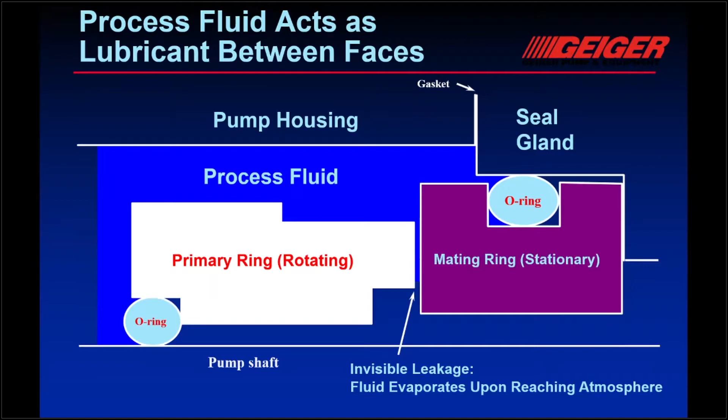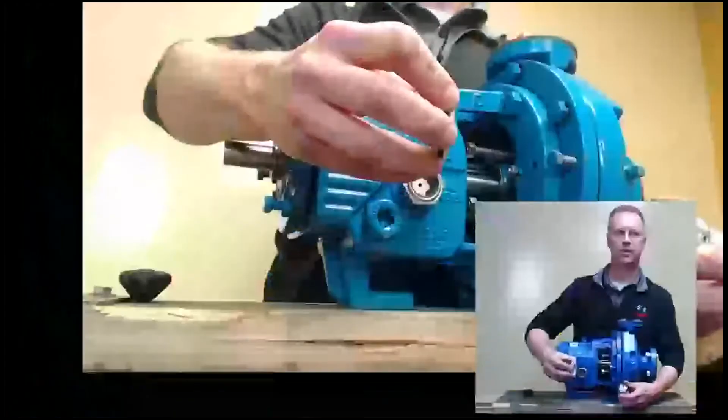So if we look at these, here's my primary ring or rotating face, here's my mating ring and seal face, if you can see them okay. And then we also have our seal gland, which is on the back side here. That all gets installed onto the pump and seals the fluid into the wet end of the pump and keeps it from leaking out.

So the whole idea is that these two seal faces are going to be super close to each other. It's going to allow a little bit of leakage, but that leakage should evaporate almost immediately upon reaching the atmosphere, and you really shouldn't have any drips coming out of your mechanical seal.

So in order to put one of these in, we have to do some checkouts of our pump. Now, this pump is our training pump, and I know it's in good shape, but I'm going to rattle through some of the things you want to check to make sure we have a good seal installation, whether it's a component seal or a cartridge seal.

Pump inspection. First thing we want to do is check for shaft run out. The PowerPoint will have a picture of the inside of this pump. I'm not going to pull it apart yet until we get into the seal installation, but let's talk about shaft run out.

The shaft could be bent, it could be moving up and down, it could be from old packing that was in there and you didn't replace the shaft. It could be off center. It could be lots of things, could be loose bearings back in the power frame, and so that shaft could move. Since our seal is attached to that shaft, that could cause us problems. So we want to check all that stuff.

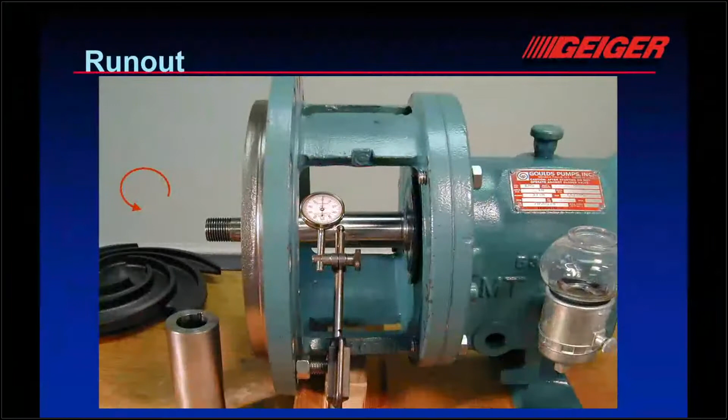Here's a picture of us checking the run out. When this pump is fully disassembled, if this was a real application out in the field, we would put our dial indicator close to the shaft and check for run out. Appropriate run out is a couple thousandths - we wouldn't want that thing moving more than that, otherwise it could affect your seal.

Another thing we want to do is a face run out. In here in the pump is the stuffing box, and there's the seal face. We want to make sure that's parallel and flat all the way around, because our seal gland is going to mount up against there, and we want that nice and straight. Important point: if you have excessive run out, this face should be true to two thousandths. If the face run out is larger than that, the seal faces could wobble and reduce your seal life. Keep that in mind, you might see that again.

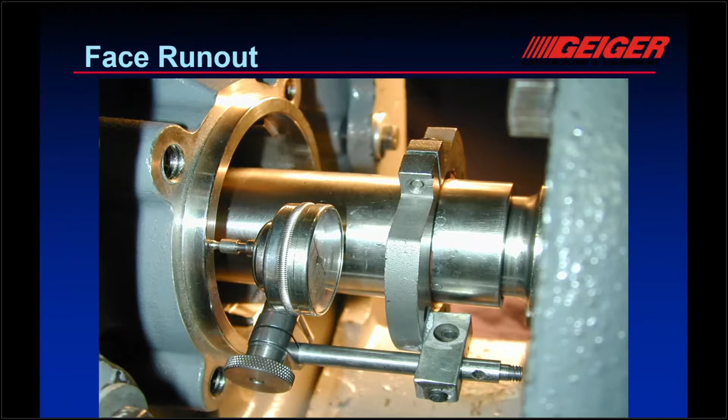So here we are checking the face run out, where we're actually rotating, mounting the dial indicator to the shaft sleeve, and rotating it right around the seal face, and that's this area right in here.

So we're going to start getting into installation of a non-cartridge component seal. We're going to do two seals today: a non-cartridge component type seal, which has components - a seal gland, the mating ring, our seal gland gasket, and our rotating or primary face. Over here we have our cartridge seal, which we'll do second, but it's just one piece. So we'll let you guess later which one's easier to do.

First thing we want to do is get our pump apart. This is a back pull-out design, and it'll be nice and easy to get this thing apart because I already undid some of the bolts. Before we pull this out completely, in order to do this seal installation, we need to make a scribe mark on the shaft sleeve here.

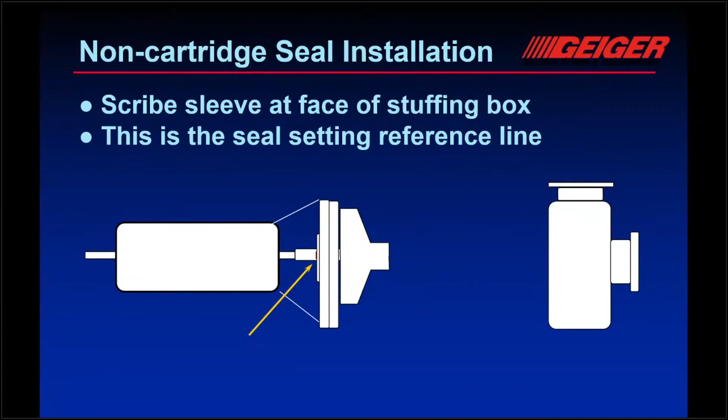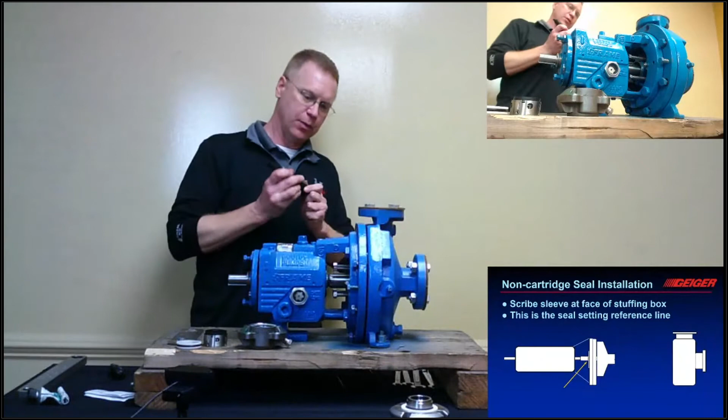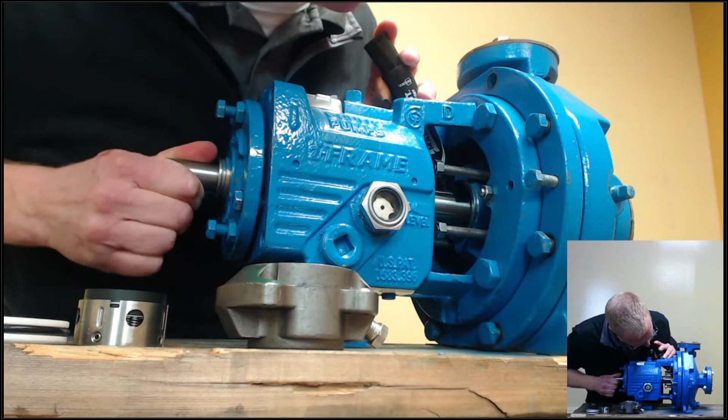There is a reference setting, which we will get into in a little bit, that is in the seal drawing - we'll get more detail on that - but everything on a component seal is off a reference mark, which is based upon where this seal face is. Since we have a stainless steel shaft sleeve, we're going to make a little mark here with Sharpie on our shaft sleeve, so we can scribe it and know exactly where the seal face is on the shaft sleeve.

So I'm going to mark this and make sure I get it good. And then I have a nice little flat straight edge here, and I'm going to put this right down here through and hold that right up against the shaft, nice and flat. When I rotate this, I'm going to scratch and make a scribe mark right on that black Sharpie marker. So I think I got that pretty good.

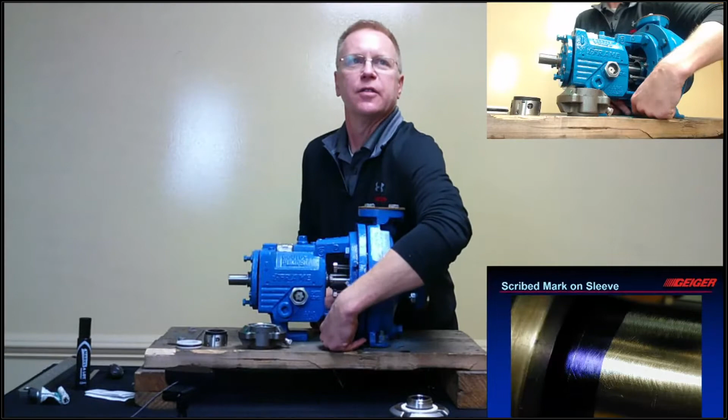Now we can start disassembling our pump, now that we have our scribe mark. Once we pull it apart, we're not going to be able to make that scribe mark very easily. There it is - in the PowerPoint, we made that scribe mark right in here. So we are good to go.

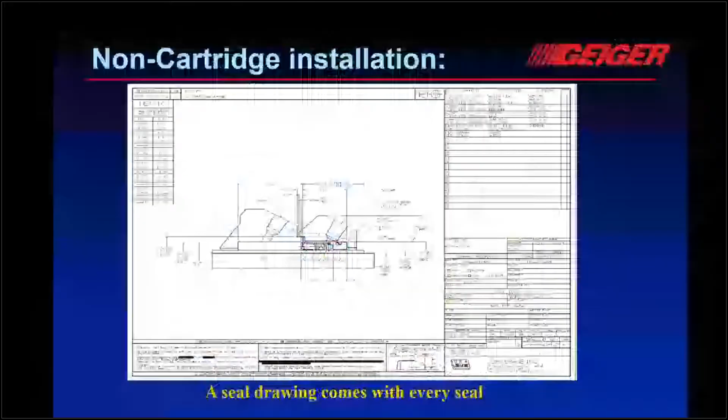On a non-cartridge installation, actually with any seal installation, you always get a seal drawing. So this is what a seal drawing looks like, and it has a reference mark or a reference set point. Important thing - see that in yellow down there? A seal drawing comes with every seal. It details everything out so that you know the clearances, so you know whether your seal is going to fit here into this pump.

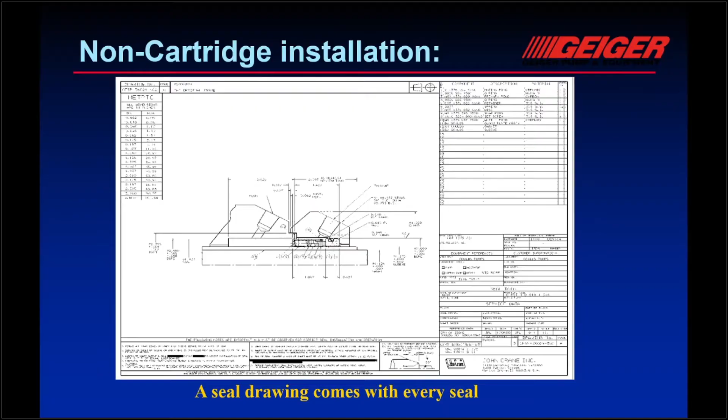For this particular pump or seal, we have a 1/16 of an inch installation reference mark. That is telling me where this primary ring will go onto the shaft sleeve. It's very important, and that's why we made that shaft mark. If you look at this, the seal face mark is right there at number 12, going down there. That's the front of that seal face. So we had to make that mark exactly on the shaft sleeve where that number 12 arrow is going to.

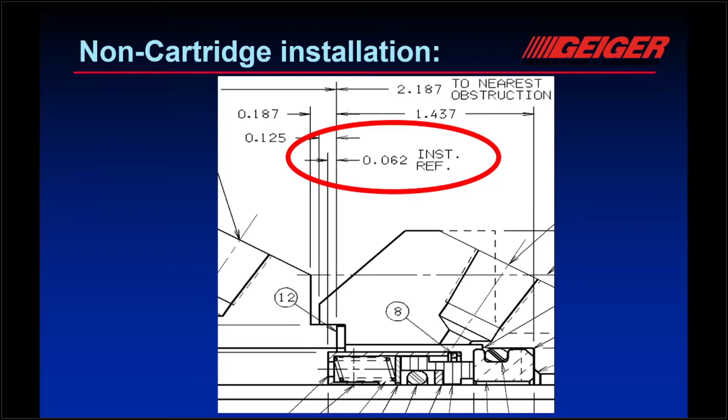And then we want to set our seal, the back of this seal, on the shaft sleeve when we pull everything apart, exactly 1/16 of an inch away from there. So I'm going to move some stuff out of the way here, and I believe I got all the bolts out. Yep. And we're going to pull this guy apart.

This particular pump is a Goulds 3196 ANSI pump, and just for information, the seals we're putting in today are both John Crane seals. They were nice enough to provide us this stuff for this training session. So we have the back pullout out. We have to get our impeller off.

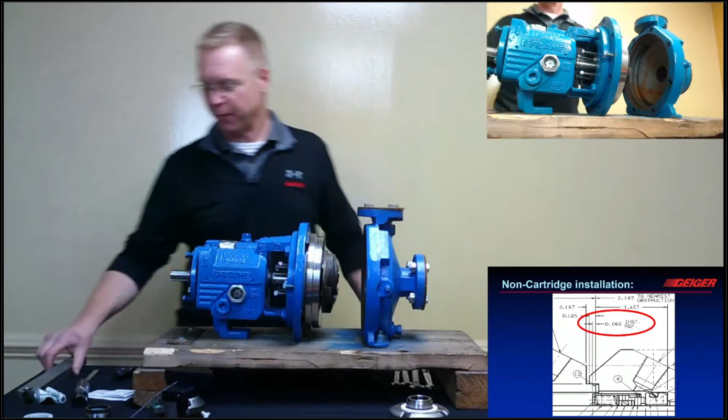One of the things - actually, the last course I taught, somebody asked, 'Boy, it's a pain sometimes to get the impellers off. Do you have any tips?' A lot of times you just have to use brute force to get the impellers off, especially if it's an old one. If it's one that's bolted and keyed onto the shaft, sometimes you might need to use wedges once you get the bolt out, behind the impeller, to slowly push it off. This particular pump has an open impeller with vanes, as you can see.

Somebody said, can't you put a screwdriver in here and wedge it to get this impeller off? I wouldn't necessarily do it because you can break a vane tip. But the easiest thing for us to do with this particular pump, since it's threaded on and rotational, is use this nice little tool we have. It's a big breaker bar, and we put this onto the shaft here.

When I slam this nice and hard, that impeller is going to come spinning right off. Look at that. So it wasn't super tight on there, but still this is a good way. Slam this thing a couple times, and for this particular pump, it works great for getting the impeller off.

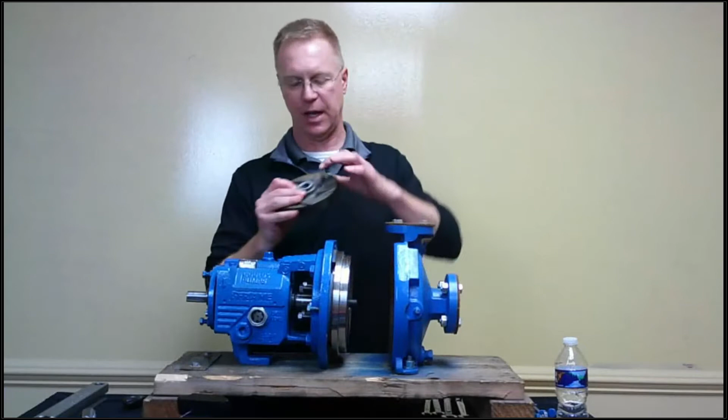Once we get this impeller off, I'll show you one quick thing. This impeller has an O-ring on it, which seals the shaft and keeps liquid from going up the shaft. It has a tiny little O-ring in here that should be replaced every time on this particular pump. You really need to look at your manufacturer for the pump to see if there's anything needed when you take your impeller off to get to your seal.

One other thing about this particular pump: it has a little space in here, and I've heard some people say, oh, we could heat it to help get it off. Don't do that on this particular pump. There's a little air pocket in here that can heat up, and this thing can pop and explode. So we don't want to do that on this particular pump. We just want to spin this thing off.

A strap wrench sometimes works for trying to get this off—just wrap the strap wrench around it. All right, so now we have our impeller off.

Now we need to take our stuffing box housing out of here. This is our stuffing box. There are 2 bolts that hold it on, and we're going to start removing this. Then we can get to our shaft sleeve. Very carefully, once the 2 bolts are off, we can lift this out of the way.

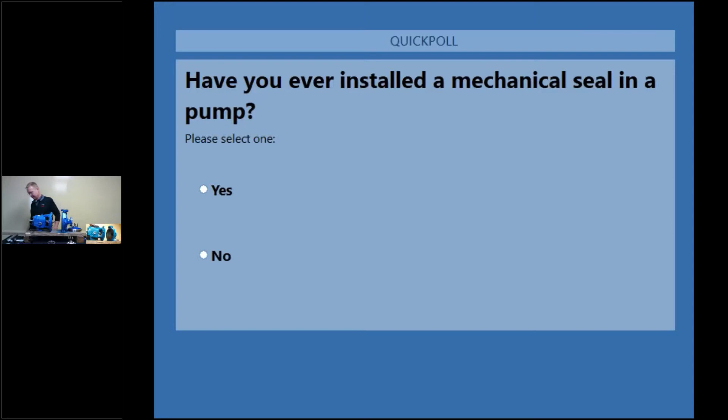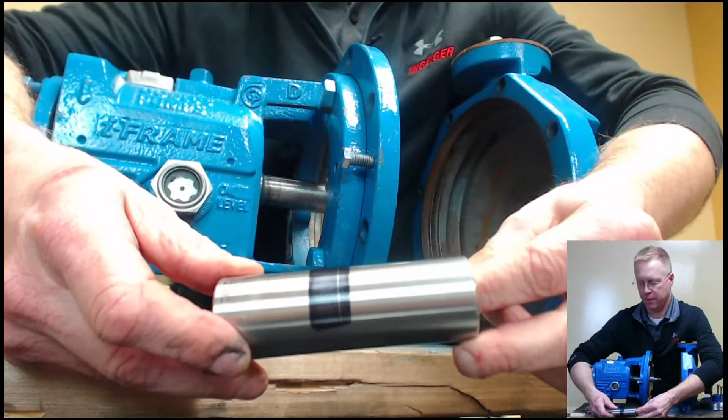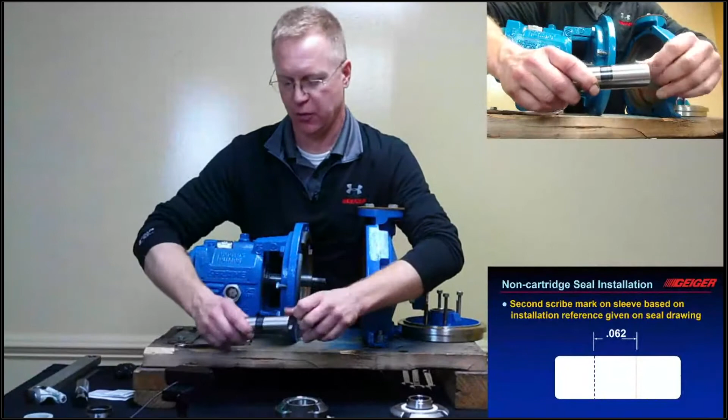We'll slide our shaft sleeve right off. So I can come down here and show you my nice scribe mark that I made. Right there, towards the impeller side. I have my scribe mark, and in this case we want to go 1/16 of an inch towards the impeller. If you remember, our shaft sleeve was installed like this, the impeller's over here, so I'm going to go 1/16 of an inch that way to set our seal.

That will be the back side of the seal. So what I'll do here is come up to a nice flat spot. I have my tool, and unfortunately I've got to take my glasses off to see this. We're going to measure 1/16 of an inch, and I'm going to make another scribe mark.

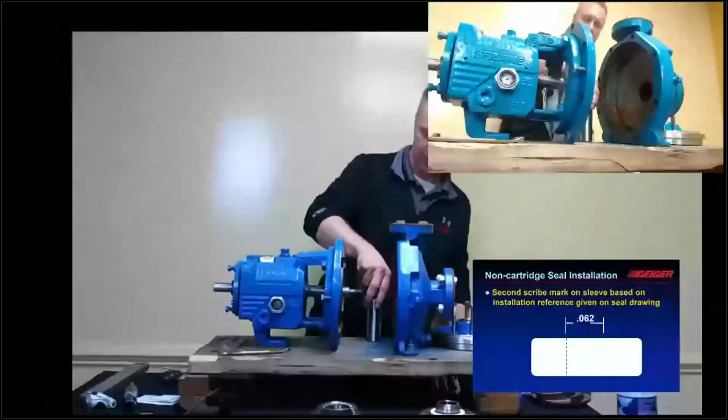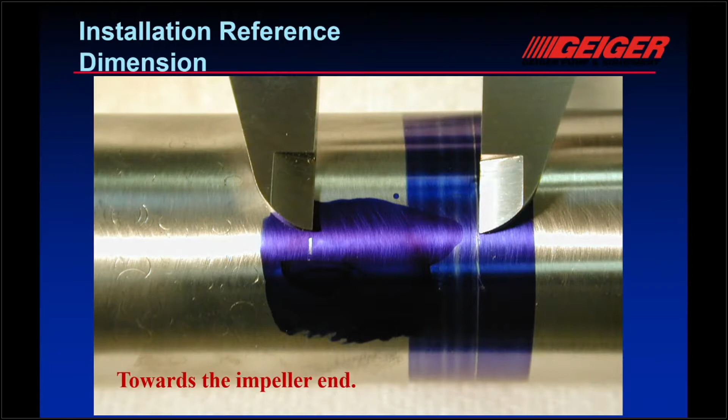It may be hard for you to see, but I can see it—I made a second scribe mark here, and that's where the back of the seal is going to get set. We're going to set that aside for a second. Let me jump ahead. So there's my second scribe mark, towards the impeller end. Now we want to start installing the cartridge, or the component seal, sorry.

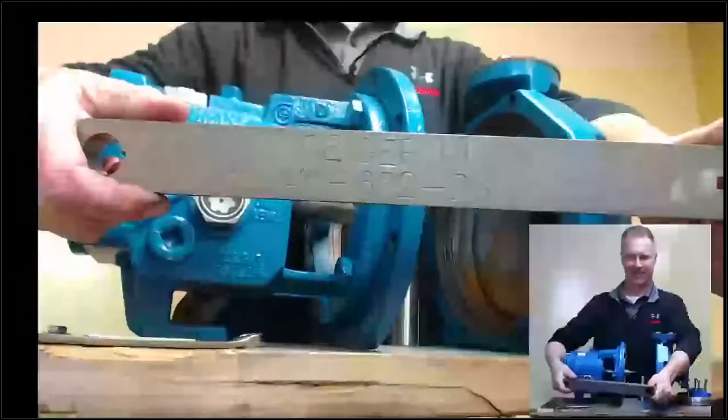Yes, and we'll zoom in on it. If you can see this, this is a homemade wrench. We actually make these in bulk because we're one of the largest distributors of Goulds pumps in the Northeast, so we made these wrenches since we're working these pumps all the time. This wrench is made by one of our machinists down in our Baltimore shop. We can make them for different shaft sizes depending on what your pump is, and we sell these for a couple hundred dollars. This thing is pretty heavy, cool steel here—very nice tool to have if you have a spin-on impeller.

Thank you for the question. So first thing we want to do, moving on.

We want to install the seal onto the shaft sleeve. We're going to go in one direction here, and we have a reference mark. First thing before even trying to put this on is let's make sure there are set screws on here, and make sure that these are all loose so that we can get this unit on.

One of the things I'll mention several times here, an important thing, is that we should keep these seal faces clean. Especially if you're working in a dirty environment, we'll want to clean these faces before install onto the pump.

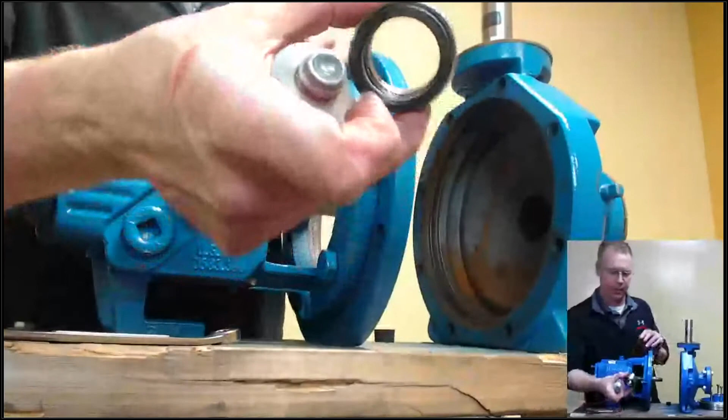Important thing to do when we're putting this on: we want to lubricate the O-ring. This has an O-ring that's sealing up against the shaft, right down in here. We want to get some lubricant. Very important, the lubricant should be compatible with the fluid that you're pumping. I think almost everybody here works in the water wastewater market, so you certainly don't want something incompatible to contaminate the water. Something that's food grade or the like would probably be good, some kind of lubricant just to help that O-ring slide onto the shaft here.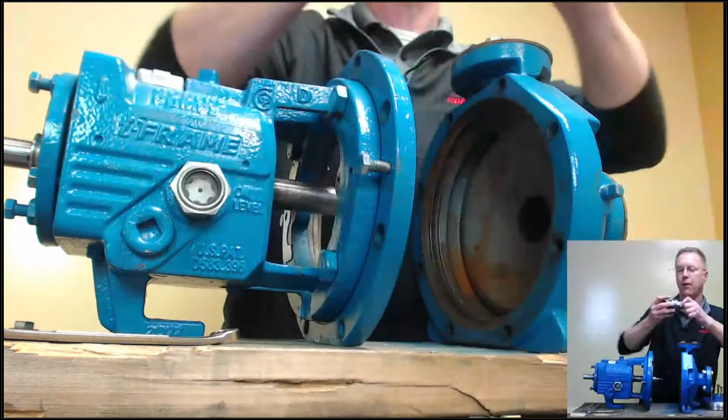We're going to slide this without touching the seal face, and we slid it on. Now we want to set the back end of this right to that scribe mark. I have that right on my scribe mark, and I want to go ahead and start tightening this unit down.

We want to tighten this evenly. We don't want to distort anything, the shaft sleeve, or have this thing off center. So lightly tighten it this side, go the opposite. There are 4 set screws to set this in place. We want to make sure that this goes on here nice and evenly. We don't want this thing wobbling.

Once we get this tight here, we don't want to over torque these when we're tightening them down, but we want to make sure they're nice and snug. Now that I've got them all nice, looks nice and centered, I can tighten that side. Real good.

All right, so we're nice and tight. Put that aside for a second, and we need to pull up our reference mark.

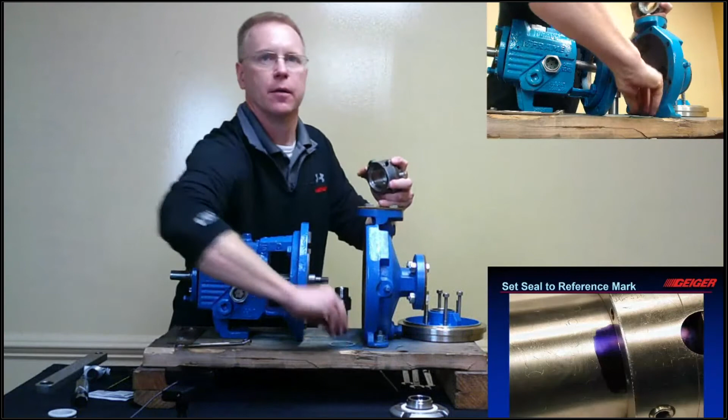We need to start putting our mating ring into our seal gland. Here's our seal gland, and here's our mating ring. Same thing, this has an O-ring, so we want to get our lubricant here.

Put that on the outside of the seal so we can slide this in. Now this one in particular has little notches in the back of it. Some seal glands will have pins in here, and they're anti-rotation pins. This one does not, but if you have a gland that has anti-rotation pins, you'll want to make sure that when you put this mating ring into your seal gland, those little notches match up to your anti-rotation pins.

Slide that in, and this is the part where you're definitely going to get your fingers on here as you're trying to push this in. Unfortunately, if you can use rubber gloves, that's good, but you still will want to clean everything prior to installation. Just make sure that this thing's all the way down and snug.

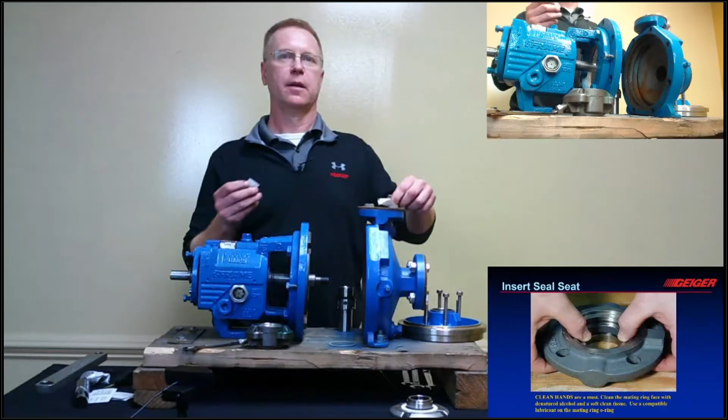We can clean it with denatured alcohol. I have some little alcohol pads. I'm going to go ahead and clean this, get this all cleaned up. Just wipe it real good, and we'll do the same here on this unit.

Can't forget to grab my gasket. Put our gasket on here.

Slide that up there. Now we'll go back and slide our shaft carefully up and slide. All right, so we're all set here.

One note to make, this seal gland happens to have a flush on it. So if you have flushed water going to your seal, some have them, some don't. It's not always necessary. If you're wondering whether you need flushed water to your seal, you really need to ask your seal supplier or manufacturer: this is what I'm pumping, this is the style of pump, do I need a flush, or should I have one? Obviously, flush gives you the longest life, but in some applications it's not always necessary.

Now that we have that all set up here, we can take our gland nuts off and slide our stuffing box back into the pump. I'm going to give myself a little bit more room here.

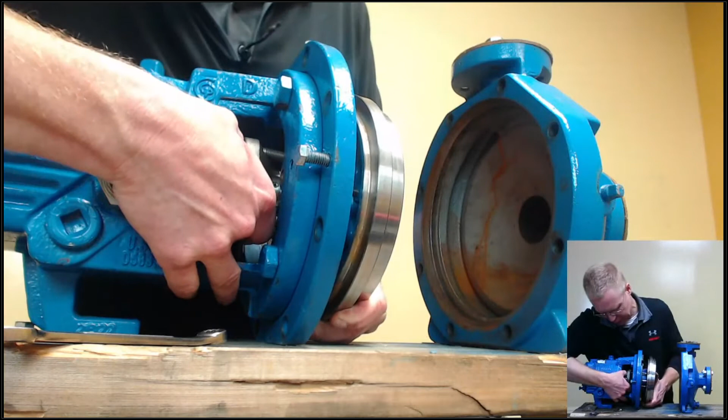So very carefully, we're going to hold everything, and this is a little bit of a challenge. If you have somebody helping you, it's always good. But very carefully, make sure the gasket stays in, and there we go. All right, all slid in.

All right, so the gasket's on, so now we want to go ahead and put our gland bolts back on to hold everything in place. One gland bolt. All right, and then we're going to want to tighten that up to make sure this stuffing box is nice and snug so that when we go to put everything back together.

So let's jump ahead there.

All right, so now we're at the point where the seal's on back here, but we don't want to put the bolts on yet because we want to make sure the shaft sleeve is in place. Remember, we talked earlier that this impeller holds the sleeve in place. You may have a shaft sleeve held in place with set screws, so you want to make sure that's in the right location, but with this one, the gasket and the impeller pushed up against it put the shaft sleeve into the right location. So before we put the bolts on the seal gland, we want to go ahead and get our impeller on and get that nice and tight. So we're going to spin this on.

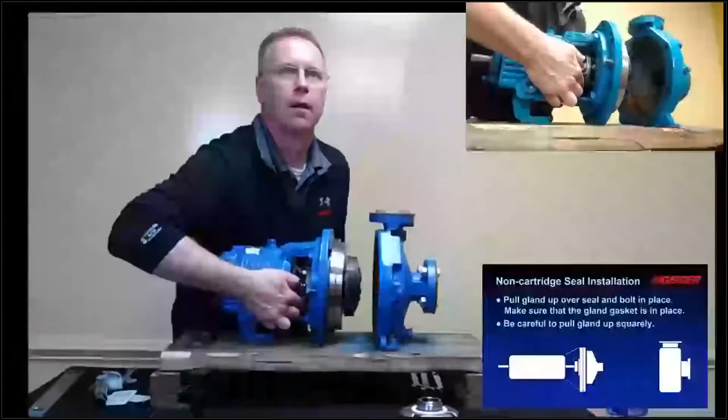So I'm going to do them by hand first, make sure they're all snug, and then we'll go and tighten them down. Almost there. Keep tightening it until we're nice and snug. Right, that one.

I'll mention one of the things: once we fully assemble a pump, at least in our shop, part of our standard practice is, after we've assembled a pump and put a seal in it, we pressure test the seal once it's all done. We'll reassemble the pump, put it back into the casing, seal off this end and the top, put a pressure gauge on it, and put air on it. We'll let it sit. Usually the guys try to set it up so it's sealed, put air on it, and let it sit overnight. When they're wrapping up for the day, they'll put the air on it and it will sit overnight. It's a good way to determine if our seal is leaking or not, if we installed it properly.

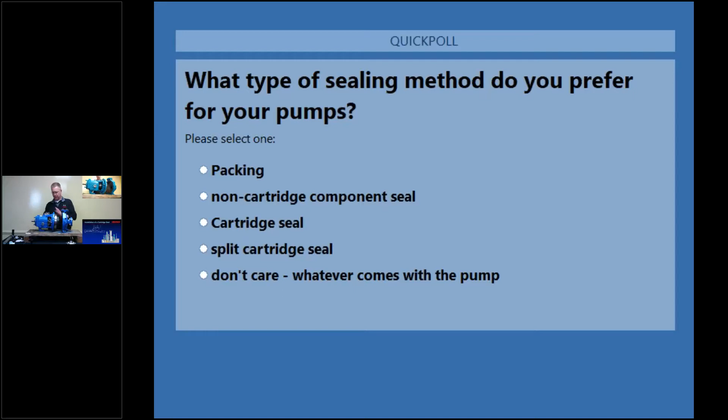How we look? 100%. All right. So you can put the video back on while I get these gland bolts out.

So we are done the hard one. Thank God. Takes a while, but like I said, the component seal can be a challenge, and if you mess up making the scribe mark or do something wrong, you can really be in trouble having to pull the pump back apart and reset everything and make sure everything's done.

So very shortly in a second, we're going to get to, so I can get these last couple of bolts out, get this thing apart, and we'll do the cartridge seal. One more bolt here.

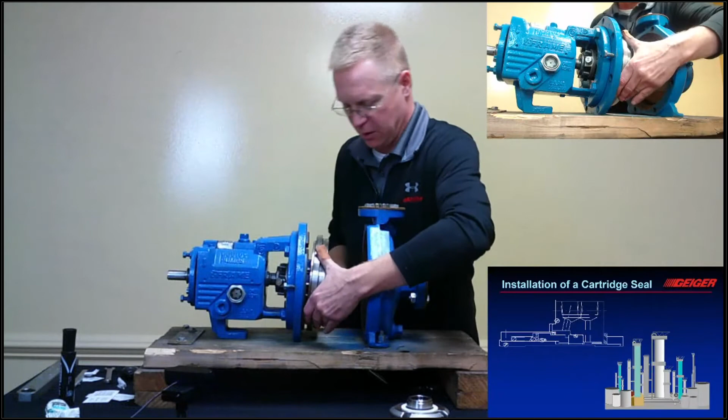So we're about 45 minutes in, and on the shortened version, it probably took us about 25, 30 minutes to put that component seal in. And I didn't even do any of the run out checks or any of that kind of stuff. We just kind of assumed that this thing was good to go.

Get the stuffing box off. There we go. Okay, so get our gasket out and shaft sleeve out, and get our component out there. So the last thing I have to do is take the 81T out of here. So we'll loosen up these nuts, set screws, and we should be good to go and ready to start installing our cartridge seal.

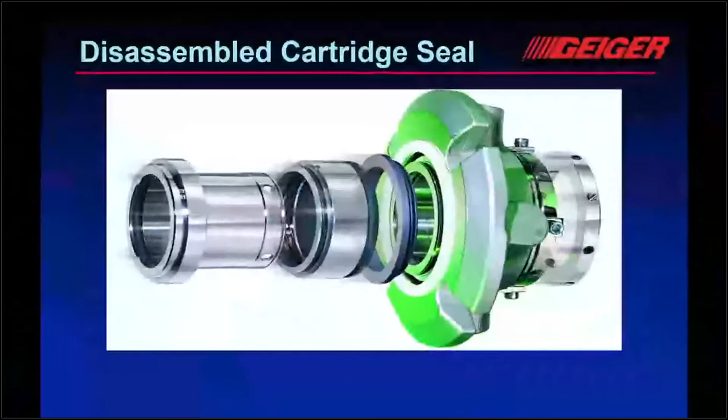Shaft sleeve out, and I'm going to put it up here. So let's talk about the cartridge seal. So cartridge seal, a little different, all one unit. What's holding this whole thing together are these set screws. When we start putting this together, you have these set screws here that are pretty much holding the whole thing in place. There are clips - I should say clips - these clips hold everything together. And then once we put our set screws onto the shaft sleeve and get this thing set in place, then we can get everything assembled and take our clips here out.

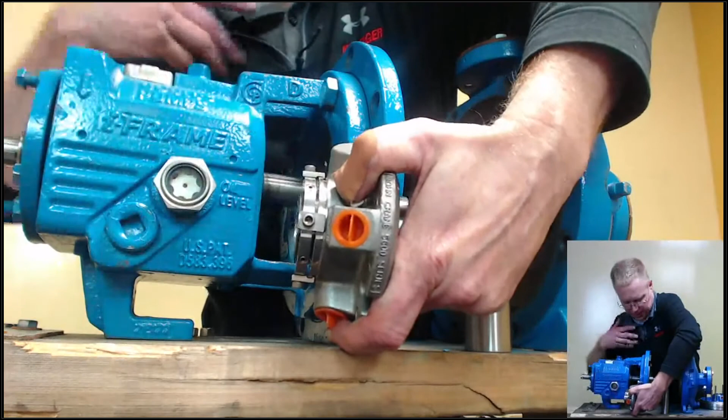But we have an exploded view in the PowerPoint right now up of the cartridge seal.

Question: is there not a specific torque for the bolts you're working on now? Can you be a little more specific on the bolts - is it the bolts for the stuffing box or the set screws? It was the ones, I think, for the stuffing box. For the stuffing box, there will be specific torque settings in the O&M manual for your pump. For this one in particular, I don't remember what they are, just because we're assembling and disassembling this pump. I wasn't really concerned with that, but your O&M manual for your pump should have specific torque settings to set the stuffing box in place, and even putting the casing back into the pump volute.

And then as far as the set screws torque setting, we want to put them in pretty tight, close enough. We don't want to egg-shape the shaft sleeve, but we do want to make it pretty snug so that those set screws don't come loose once we're putting that on. So hand tightening - maybe more than hand tight, but pretty snug. These set screws do have little dimples or points on them, so they dig into the shaft sleeve. If we put them in pretty tight, they should stay in there pretty good. There may be specific recommendations depending on your seal manufacturer, they may recommend a specific torque setting.

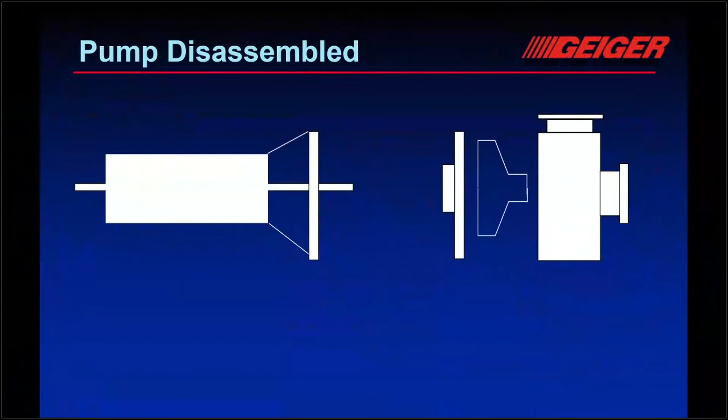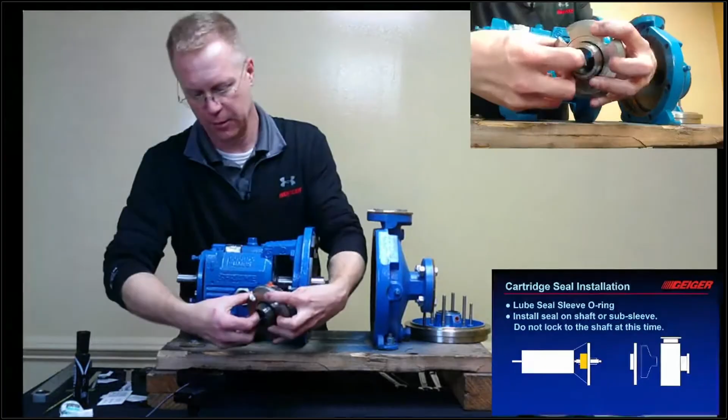So we have our pump disassembled, and if we have a shaft sleeve separate from coming with the cartridge seal, we want to install that also. So we have the separate shaft sleeve that is with this pump, and we want to begin installing that. So same thing as we talked about before - inside here, there's an O-ring, right down in here. So we want to lubricate that O-ring.

So again, lubricant needs to be compatible with the fluid that you're pumping. For example, we sell some pumps that go into gasoline service on our industrial side, so certainly we want to have a lubricant that's compatible with any petroleum products for that type of stuff. For you guys, almost everybody here is water, wastewater, so we probably want a food grade grease to put on there so that we can slide this on.

So we lubed our O-ring, and we can slide this cartridge right up onto the shaft sleeve right now. We want to push it all the way up, not completely off the shaft sleeve, but all the way up to the very end of the shaft sleeve. So lubricate.

So now this is the tough part, because everything's already on here and kind of locked - not locked in place yet, but pretty darn close. We want to carefully line up the bolt holes, and as best we can, slide everything right in there. Install our stuffing box bolts to hold everything in place.

One of the things I should have mentioned, we have our ports for our seal for flush. Depending on where your water lines are coming in, you want to adjust the seal accordingly so that you can have them easily attached to your water lines if you're using flush water.

Now we get to put in these gland bolts again. Probably the hardest, most time-consuming part is just trying to get our gland bolts in there on these small pumps. So there's one. And again, just like we did on the component seal, once we get these on here, we want to tighten these down evenly.

Notice one thing I didn't have to do: I didn't have to put my impeller on at this point. I will, but at least to get up to this point I didn't have to. So that's not a bad thing, because nothing's attached currently to the shaft. The seal's just sitting on the shaft sleeve right now.

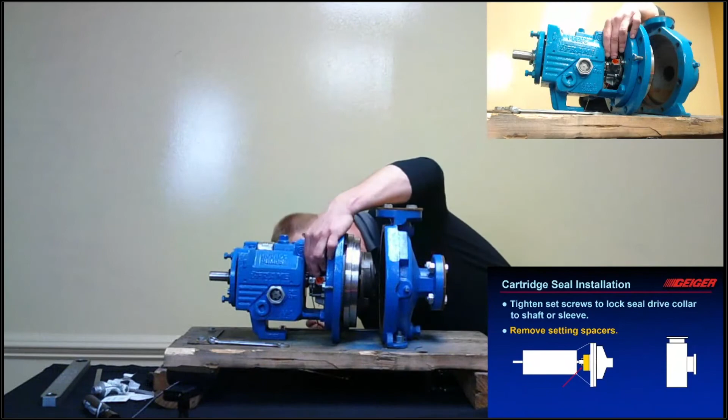So what we want to do now is start locking on the set screws for the seal. Just like the other unit, we're going to do one side at a time. These are a little bit of a challenge just from the location. Two opposite ones done. We'll go to this one.

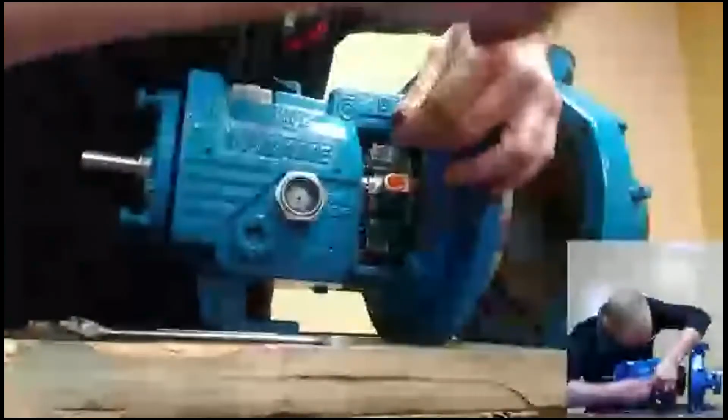Now that we've got them on there pretty good, we can tighten them down real good. I'm not wrenching these on, but I'm going pretty tight, so we don't want that whole sleeve to rotate. That ring's going to rotate with the shaft, so we don't want it coming off. The set screws have little points on them, so they'll dig into the shaft sleeve a little bit, but you still want to make sure this is nice and snug.

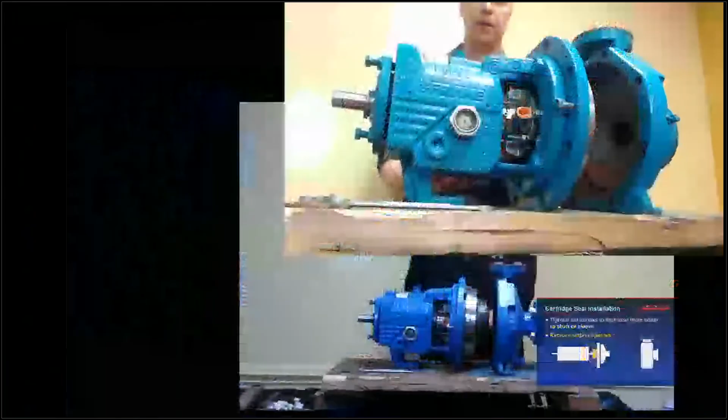So we're almost done here. That's tightened down, and now we can remove the setting spacers. These are these little clips, and that's holding everything together. So now once we take these off, since everything's locked in place, our seal is already preloaded at the right setting dimensions, so that this thing can properly seal your fluid in there. So we didn't have to do a scribe mark - these setting clips set everything.

So when we sell a pump and we have a seal, in case you guys need to take the pump back apart for some reason, we always send the setting clips along with you in a baggie if you have a seal already pre-installed from us at the factory.

This is the last setting clip. This is important - this is the last thing you do once everything's locked in place and set. You take these clips off. This last one's going to be a little bit tough. We may be able to rotate the shaft a little bit, and let's see if we can do that to get that last one out. This last clip out. And we are out - 4 clips out.

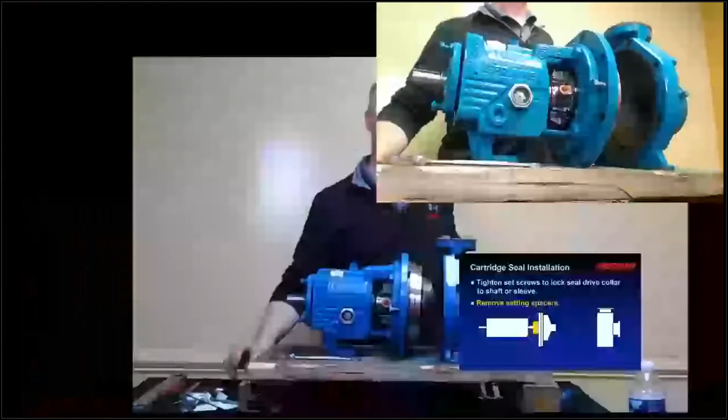And now, if I were to rotate this, this is going to rotate nice and freely on there. Your seal's set properly to the correct depth and everything, all as a cartridge. So that's the last thing you want to do is those clips, and we have our cartridge seal installed.

So we already tightened the set screws, removed the setting spacers. Last thing you do - so important question - removing the setting spacers, that's these guys right here. That's the last thing you do when you're installing this. So we are completely done with this. Now we can put it back into our casing. Again, if we wanted to check end clearance, you wouldn't put the set screws for the seal into the shaft sleeve or take those clips off until you did all that.

Cartridge seal makes everything super easy. So let's post another poll question here - I think it's the last one. And then we can open up for anything else. So last poll question coming up.